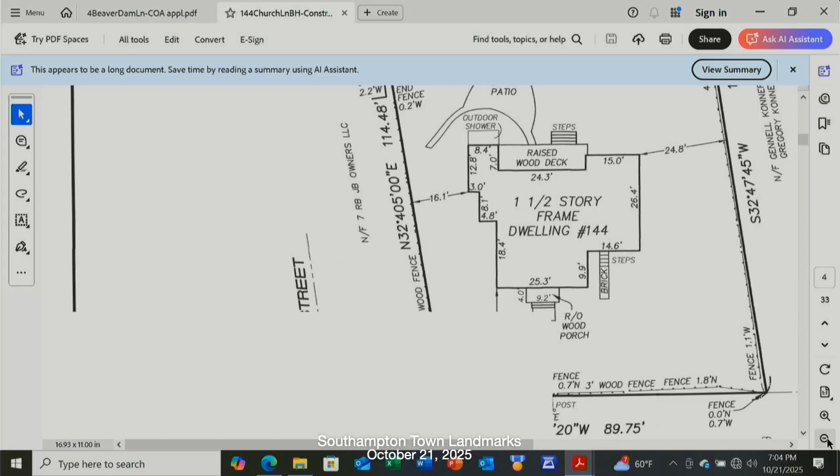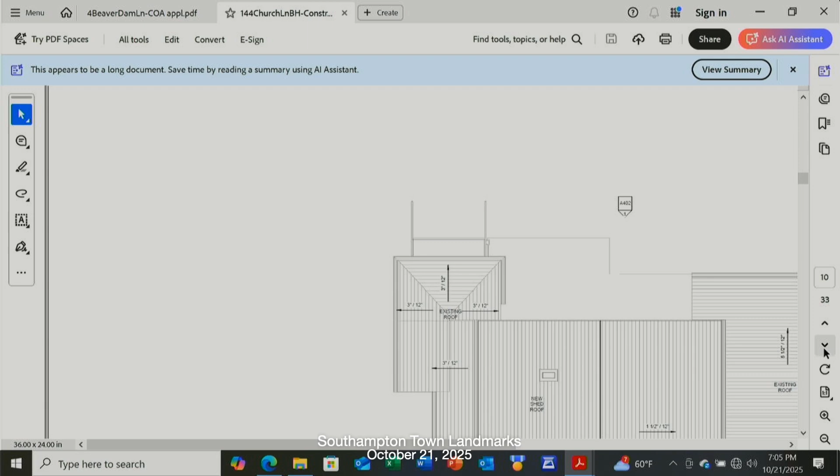Let me see if I can pull this up. Okay, here's the construction application. This is the existing situation. It fronts on Church Lane and is bounded by other properties on the other sides. Let's see, scroll down till we can get to some photographs here. Please bear with me, this is all new for me.

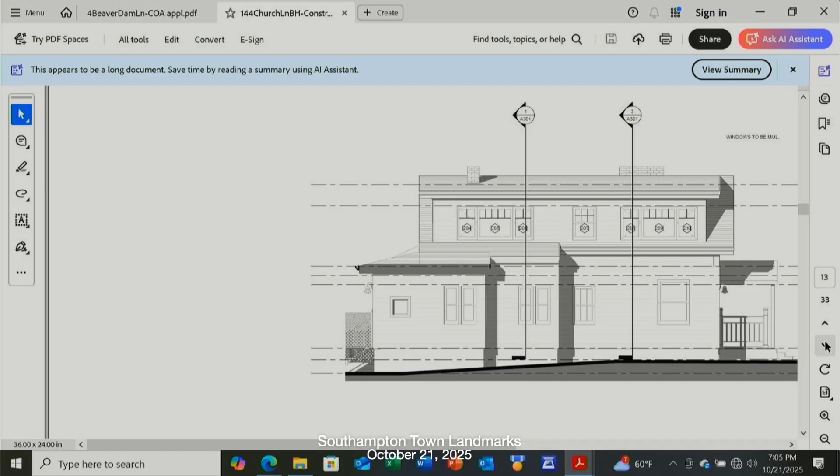So this is the attic space that's going to be converted to office space. Let's see what else we have here. This is going to be the new elevation with the attic conversion. There's a dormer, I believe, being added to the second story. It's a dormer.

There's an existing picture of the dwelling. What Ed had to say was that the construction application is to add an expansive shed roof dormer to the existing attic space under a raised gable roof ridge, to provide added living space to the one-and-a-half-story cottage. This is a building recognized in the AKRF survey as a potential historic resource. It's BHHD-117.

The entry porch appears to be original to the construction of the house, which is about 1920. The AYB of the house is 1922. Town permit records indicate a prior addition of a rear unroofed deck in 1992. Map information indicates the house was not present in 1916, but was observable on the 1930 and 1938 aerials, so that agrees with the AYB of the house.

According to the information Ed unearthed, it was Susan B. Johnson who built the one-and-a-half-story structure at 144 Church Lane. She came from an affluent family from which she received multiple inheritances, and in her early career she served as a part-time school nurse. Her circumstances allowed her leisure to spend several months each winter in the Carolinas during the 40s and 50s, and she lived in this house otherwise.

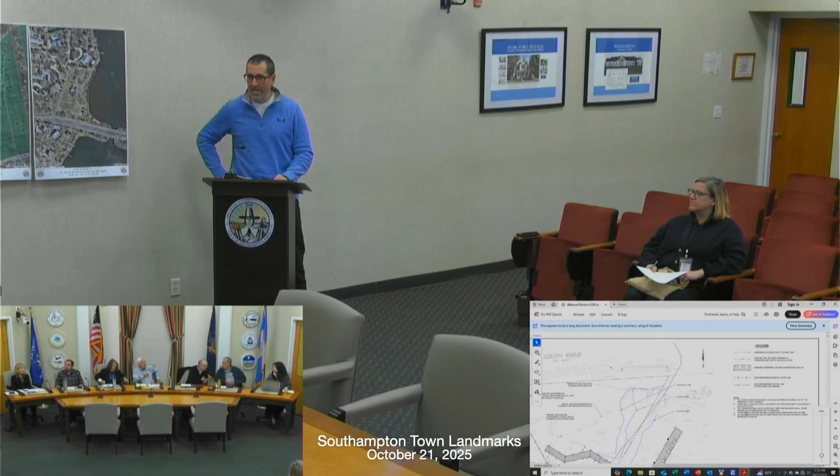So Matt Jedlicka, principal at LK McLean Associates, 437 South Country Road, Brookhaven. This project is a CPF project. It's a historic fish shack, which was basically used for fixing fishing gear and things like that. It's at 4 Beaver Dam in Westhampton. So the CPF purchased the property with the intent to, I don't want to say restore it, but basically repair it. So it's a repair of the structure as is.

There's some dock work and some accessibility stuff that we're planning to add. The dock that is on the south side of the structure and heads to the east, and then up north to the bridge, that dock is in great disrepair, unsafe. The intent is to remove that existing dock and rebuild a dock similar size, no treated lumber, all tropical hardwood. We have applied and received permission from the town trustees and the New York State Department of Environmental Conservation. We have yet to apply for a building permit, so that's why this is kind of like a pre-application meeting.

As far as the structure itself, it's a repair. We're not planning on replacing any siding. We will re-roof the structure, but that's essentially it. We're not replacing the windows. The structure was rebuilt after the hurricane of 1938, and it's kind of parged together with miscellaneous materials that seem like they were either found, so all the windows are not the same, but that's the beauty of the structure. That's about the long and short of it. It's a repair.

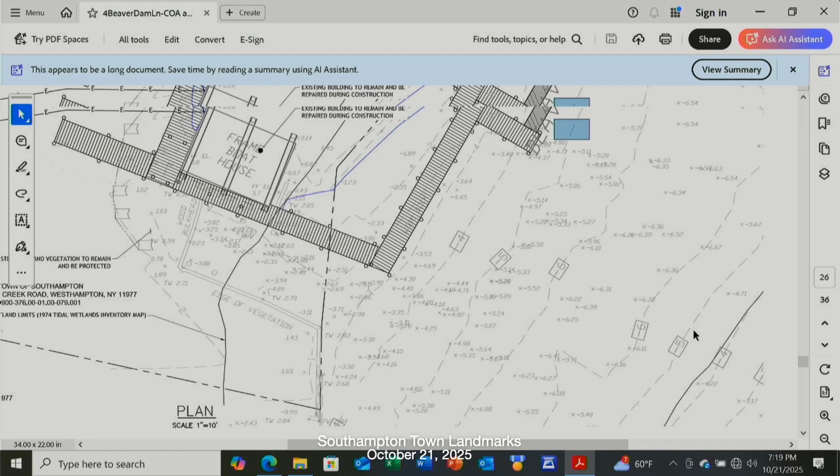So as of right now, this would be a new dock area or platform of some kind. Right, this is new, that's a new ramp up to a platform that's in front of the door that'll allow handicapped accessibility into the structure. So that's the intent of that. And this is replacement on the south side of the building, it ramps back down because we didn't elevate the dock itself to be the same height as the finished floor.

So the dock is a little bit higher than what is currently there, but not the same elevation as the finished floor. So this is essentially a replacement. Yeah, it's an exact replacement in the same spot, yes. And then I think these would be new as well here, correct? Probably the V section, but then, where the V stops, there is a dock, or catwalk, that returns to land at that location.

So the section that juts out into Beaver Dam Creek, that is new. And then the gangway down to the floating dock, that's new.

Does anybody have any questions or comments about this?

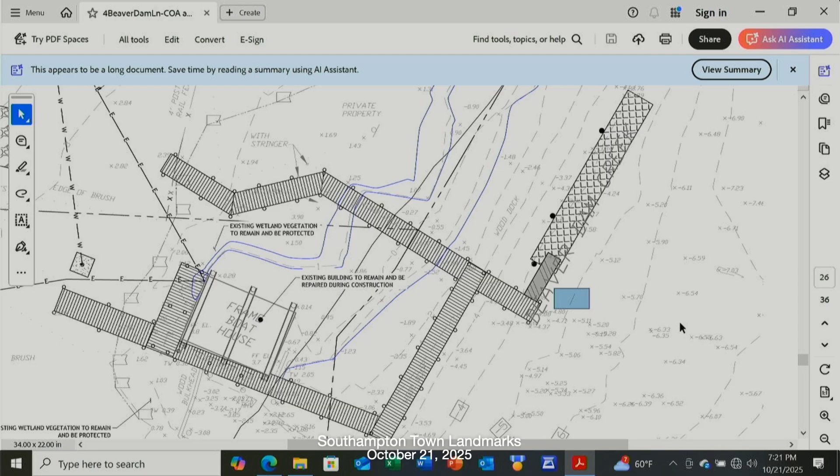I've known this property for many years. I have relations that spent a lot of time there, so I'm very familiar with the boathouse, and I think it's important that it be kept in its historically reasonable condition. I understand the needs of the Moriches Bay project for what they propose to use it for, and that there would need to be certain changes for that. But I appreciate keeping the existing siding on, keeping the existing bracing on, not changing out the collection of windows, which basically was representative of how a lot of these structures were rebuilt by fishing families after storms and things that washed away everything else.

My understanding right now is this is just a conference to get our input, and after you're done with the building department and the plans, and you're set with what you want to do, you'll be back for the COA.

Our plan is, if there's any comment, to incorporate those comments into the plan set and then submit to the building department. If there's no comments, we will probably submit this set of plans to the building department, and then I'll come back to get the COA after the building department's done what they have to do. I would assume at that time, if the building department has made any additional requirements that affect the building, we'd be discussing them.

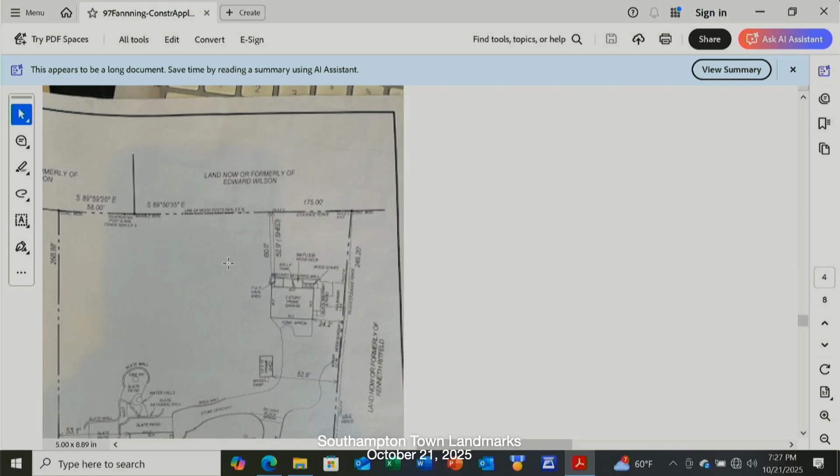The room in the front was added in, I think it was '17. It was a sunroom, and it also included all the railings for aesthetics. A few years later, just looking at a rubber roof, we put the roof deck up there. It's on top of it. It's not structural in any way.

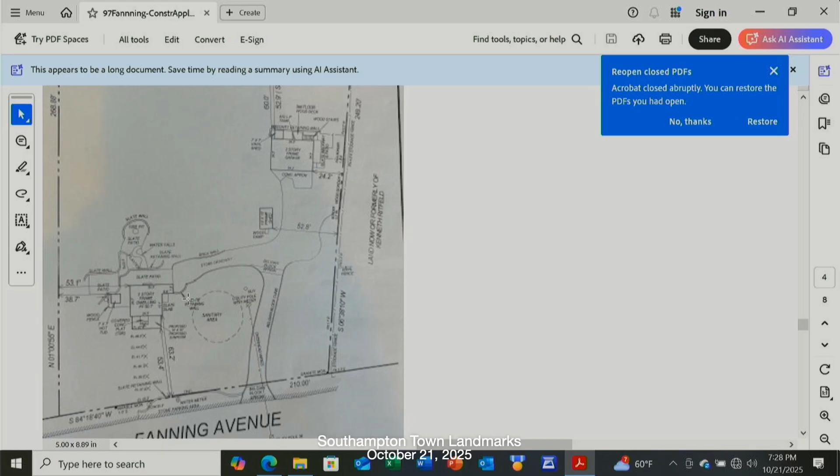There's nothing. It's just sitting on the roof deck itself.

This is on the side facing Fanning Avenue, or is it on the back side? No, it's on the front side, so it's visible from Fanning Avenue. I mean, again, looking at the pictures.

How long ago was that done? I was looking at the aerials, like a few years back, 2018, something like that. But it was approved, and everything was done as far as the railings, all approved. Everything was fine then.

Yeah, I'm sorry that we didn't. We had it recently approved by the building department. The inspector came over, looked at it, and signed off.

So when you look at the photos from up on the deck, there's no door leading to that roof deck? You go out the window. Okay, do you plan on putting in a door, or is it too low?

No, it looks like it's only about this high, so we have. It looks fairly low. I'm tired of looking at the rubber roof. It's basically roof cladding rather than a deck, other than climbing out the window. It's very Parisian.

This is for aesthetics. It's nicer to look at that with flowers than it is rubber. So you don't even use the deck, it's just visual? A couple of times, you know.

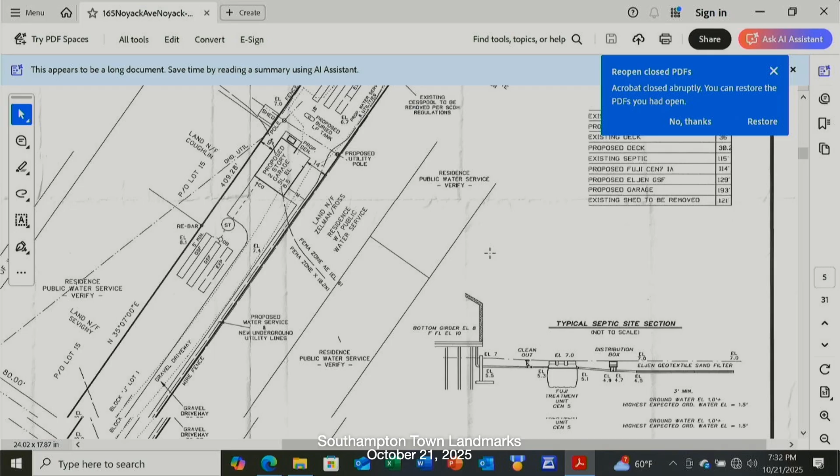This family has owned this house for the last 49 years. Now this husband and wife that inherited it are wanting to retire, and they've been working for the last 4 years to get the approvals, which they have from DEC. They have the approval for a variance for a second floor roof dormer, but they don't have the building department approval yet, obviously. Well, as they should not at this point.

Maybe after our review. And it's a pretty simple cottage that takes the aesthetic of the nearby buildings into account. Not that they're anything amazing, not any kind of amazing pieces of architecture, but they're just beach architecture.

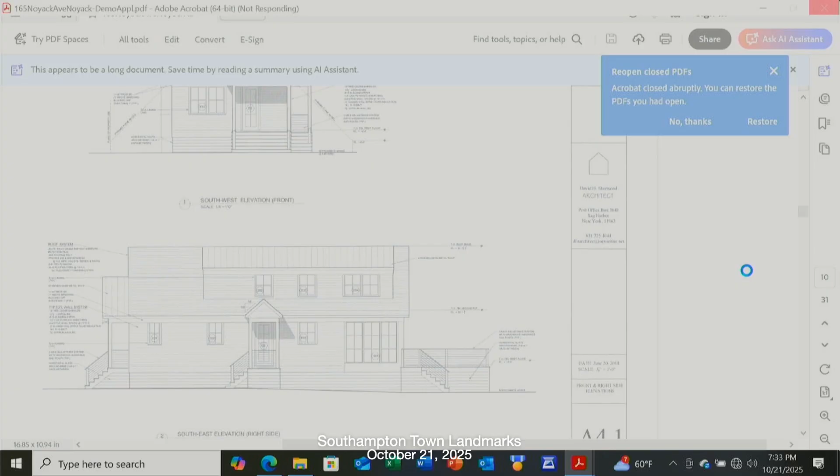And I have no objections. The house is going to be put on pilings. It's going to be raised because DEC wants it raised. I didn't see any reason to object to this either. It's not particularly visible. No, it's not.

And it's not a recognized historic resource. There is one other building on the property, which is a shed, but it's one of those sheds that comes already cutified, so to speak. It looks like a gambrel barn, but it obviously hasn't been there very long.

But that's going to, okay, and they're moving it back from the water too. And it looked like what they were proposing was not a gigantic structure either. I think they told me they have about 800 square feet now, and they'll have like 1,800 when they're finished. I don't see any reason to object to this.

The property presently includes a 1.5-story cottage with an AYB of 1940 and a detached garage with an AYB of 1940, but the detached garage likely dates from 1982 when a building permit and a certificate of compliance were issued for it. The cottage is visible from Bishop Avenue, although the garage is set back towards the rear of the property and is less visible.

The application proposes to demolish the cottage only, though when I spoke to the owner, she informed us that they're going to remove the detached garage as well. The property is not identified as a historic resource in the 2014 AKRF, nor is it identified in the historical profiles of Eastport, Speonk, Remsenburg, and Westhampton.

On the 1873 historic map, the original Beaver Dam settlement area can be identified by a grist mill, schoolhouse number 2, and a cemetery near the head of Beaver Dam Creek. On the 1902 historic map, Bishop Avenue has been opened and is noted as a private road, with several residences evident along it, all belonging to Bishop family members who settled in the area of Beaver Dam, somewhat to the north of this property.

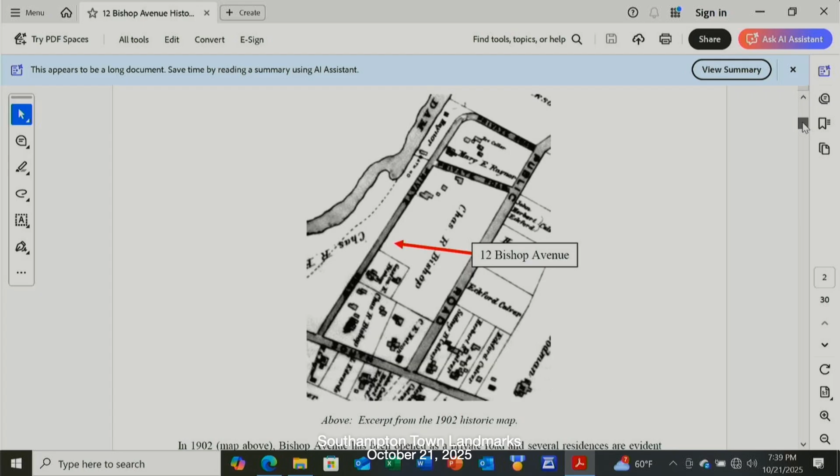The subject property appears to be undeveloped and is part of a larger property owned by Charles R. Bishop that contains several structures to the north of the subject property. On the 1916 historic map, the property remains undeveloped and is part of a larger but now somewhat reduced Charles R. Bishop property. On the 1930 aerial photograph, the property shows no development of a house yet. Collectively, the maps and aerial photo information indicate that the property was initially developed after 1930, suggesting that the AYB date of 1940 is reasonably correct for the dwelling.

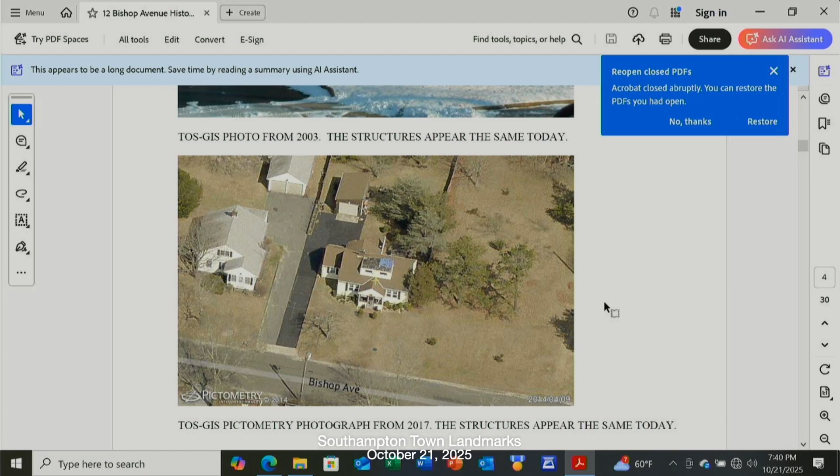The mass is irregular for the house, indicating that a number of modifications and additions have been done to the dwelling. The wood shingle roof has been replaced with asphalt shingles, the siding has been replaced with vinyl siding, and all but a few of the windows have been replaced with vinyl windows. Multiple additions have been added to the original dwelling, including a front porch addition that was later enclosed, with a brick stoop added to it.

A second floor shed roof dormer was added. The house was originally one story. The shed dormer allowed them to develop the house as a 1.5-story house, and they added stairs to the second floor, and at that time a stair to the basement.

There was a one-story attached garage previously added to the house, that was then later converted to living space, which may have been why they added the garage in the back in 1982.

There's a secondary rear addition that was added as an entry off of the previous addition on the rear of the house. There's also a circular basement, which is somewhat confusing because that tends to be found in older houses. We don't tend to find them in houses from the 1930s-1940s.

It was a big one too. Yes, it was overly large for when you see that, I think circular. I've seen it. Should have measured it, I didn't think about measuring. And the framing around it looks like perhaps they dug that basement later and then just added piers and other beams in order to support the floor joists, having taken something out of the middle of the house. Yeah, you can see the curved basement, it seems nearly there in every one I've seen. Oh, wow.

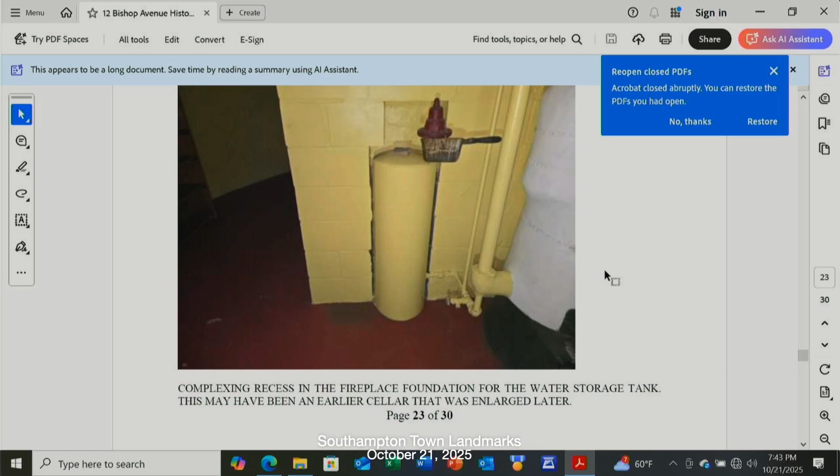Why is the water tank recessed into the foundation of the chimney? My only thought was that perhaps there was a small basement here and they wanted to enlarge it, and as they built the foundation under the chimney and the fireplace, they engulfed the water tank. Otherwise I couldn't figure out why you would do that.

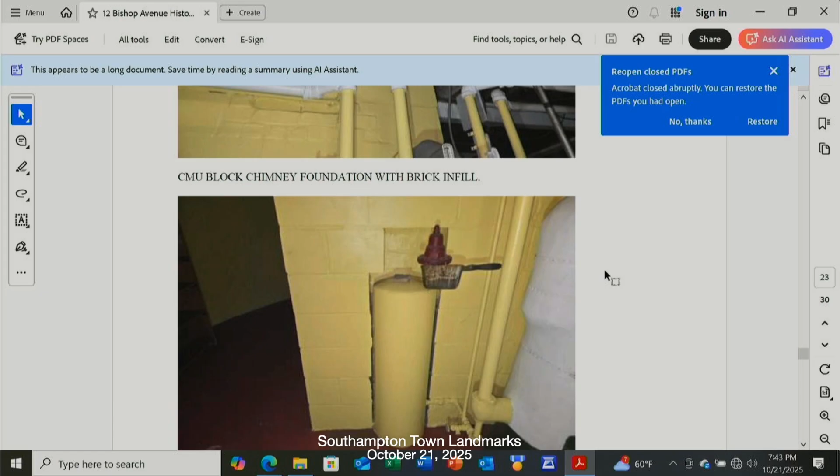That's a museum-quality furnace or boiler sitting in there, wrapped in what I can't believe is asbestos. Yeah, it's all asbestos. That it's held up as long as it has is amazing.

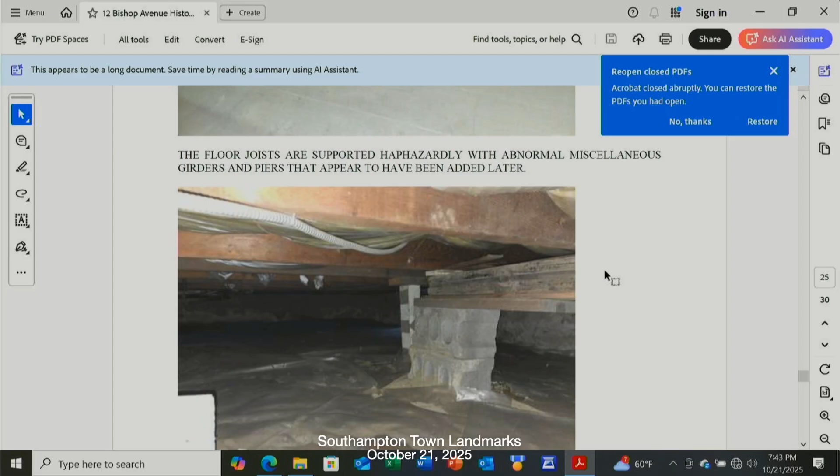So the property does not appear to meet any of the criteria for consideration as a landmark. I felt that the Landmarks Board should have no objection to the demolition application, as the dwelling has little or no historic fabric remaining on the exterior. The mass has been modified multiple times, and the detached garage from 1982 is not even a historic resource.

Well, the person that bought that, the man and his wife, they tend to have been doing that, right? They buy lots and put houses on them, on small lots. Yeah.

I see no reason to object to this. Anybody else have any? Everybody else is shaking their head too. So I think, Bill, could you make the response on this one? Yes, thank you.

Okay, I come to 54 Hayground Road in Water Mill.

This was submitted as a demolition application, but it really is a construction application. It does involve some demolition. I think, Susan, you wrestled with this one. Yeah, I will say it was. I had to sort the application out because it was a little confusing. If you could see, there were pictures of a replica house or reconstructed house, so it obviously wasn't demolished.

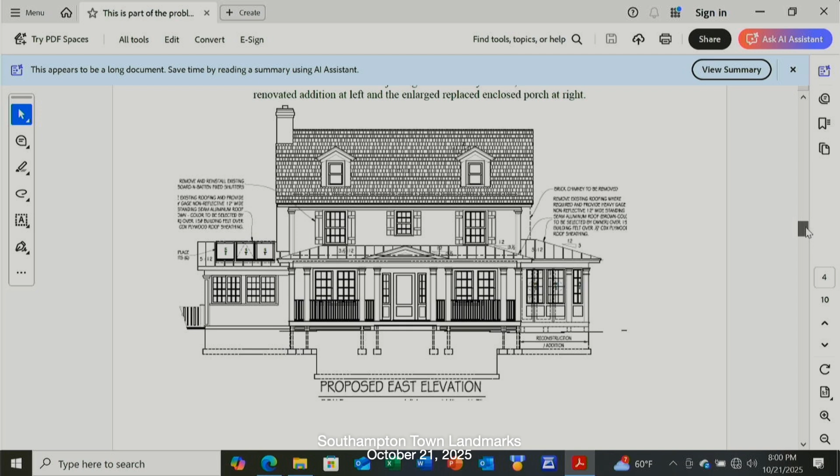As you can see, there's really no change for the main original volume. The current breakfast room on the north end is going to be demolished and rebuilt a bit larger than it is now. It's still going to have the windows that go all the way around it, as the windows will also go all the way around on the south side of the building.

This is the existing north side of the building. The changes that will occur here include demolishing that breakfast room, where all the windows are at the first level, and expanding that a bit. There is also a non-operational chimney there that will be removed. And this is what it will look like when it gets redone.

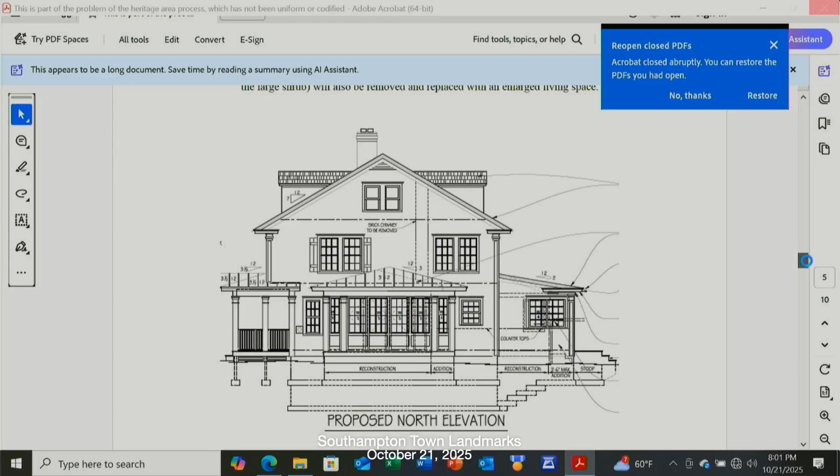The windows are not going to change, other than on the breakfast room that's going to be rebuilt. There is also a little porch addition out the back that is going to be enlarged slightly. You can't see it in the photograph above because my Acrobat is not working properly, and because there's a large shrub there. That shrub is obviously going to go away during the construction project.

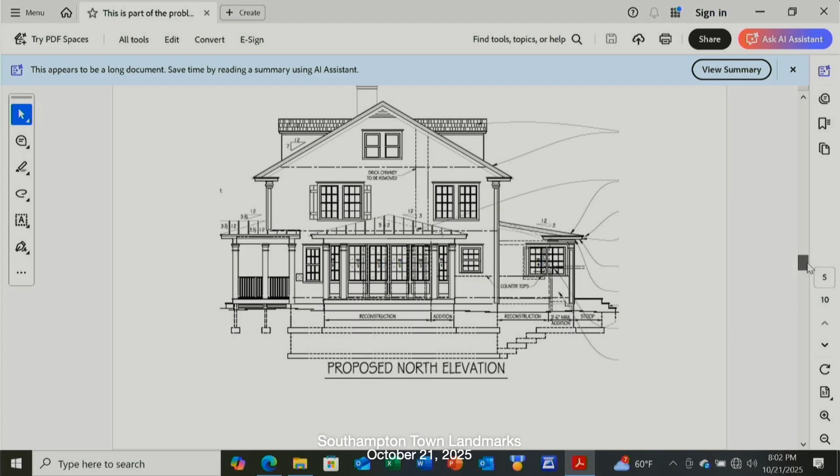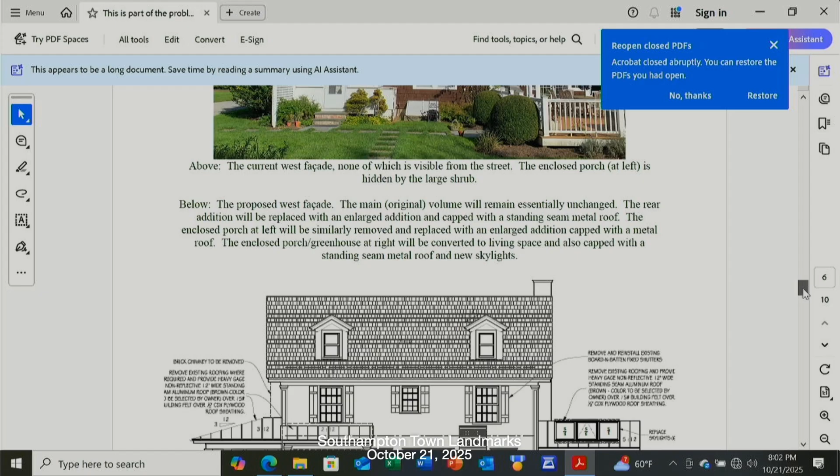The other thing that's going to happen here is there's going to be a new stoop out on the back. This is the back side of the building, not at all visible from any street or public right-of-way. The porch on the left side is going to be demolished and replaced with a slightly larger one. The garden room / greenhouse room on the south end, on the right-hand side, is going to be rebuilt and enclosed as full living space. And this is what that will look like.

Basically, the main volume is not going to change. The one thing I will note here is they are proposing standing seam roofs over the breakfast room on the left-hand side, over the little porch on the back, and also on the greenhouse room on the right-hand side. These are the only things that are significantly different from the existing construction. The existing other adjoining buildings built by the same gentleman do not have these standing seam roofs.

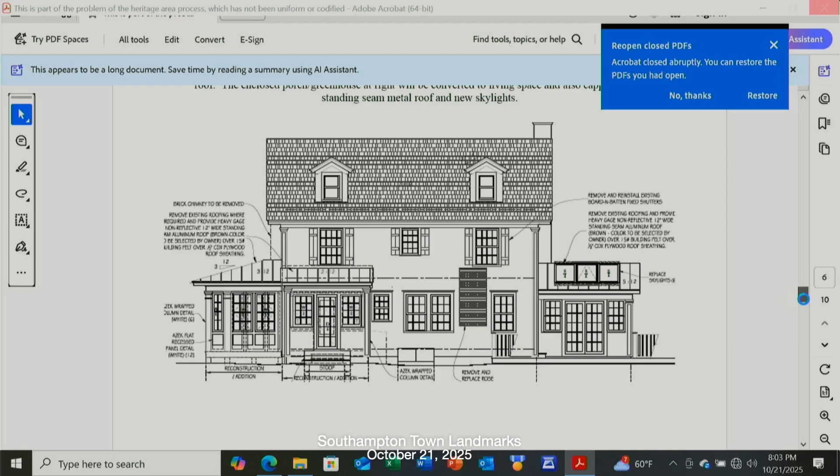All right, let's see if we can see any further things here before. These are pictures of the other two. This is a picture of its picture in the AKRF report, right there, RS-16.

And this is a picture of Lewis Pearson from his obituary. He was a well-known banker in New York City and also a big mover and shaker in the Westhampton community, very involved in quite a lot of local organizations. The families lived generally in Brooklyn or Manhattan during the wintertime and summered out here. The three daughters summered down on Shore Road in Remsenburg, and the parents lived in Westhampton in a rather large house there.

So I have no objection to the proposed work. I think the only thing that would be better from a historic preservation standpoint is to replace the existing roofing on those porches in kind, rather than with standing seam roofs. I think Bill was also in favor of that. It's his client that was driving the standing seam roofs, and perhaps the contractor as well.

So what you'll be able to see from the drive, that one area is this new northern section. You'll be able to see it - let me see if I can pull it up again. That will be a focal point. This is just driving me nuts, I don't know what the problem is. What's the program? Oh, there it is.

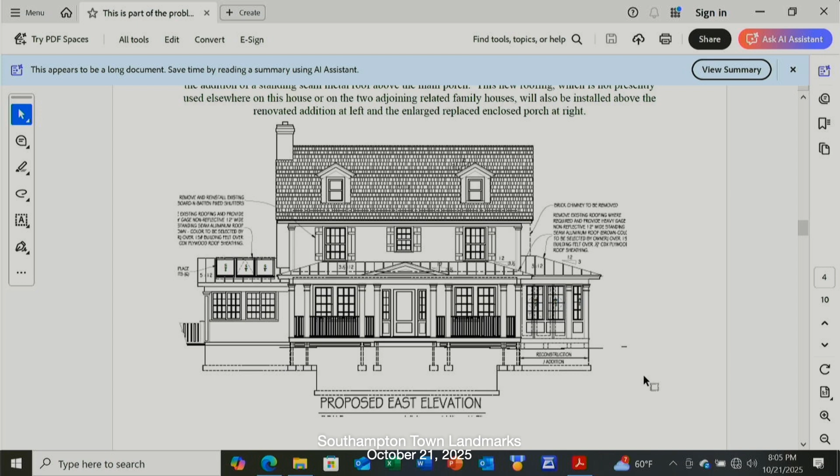I have a question - so the second-story roof is going to be replaced with a new cedar shingle? Yes, but all in kind for the lower roofs. And this is the standing seam roofs request? They're not particularly - they have enough slope on them that they could be either asphalt or cedar shingle without a problem, at least according to my conversations with Bill.

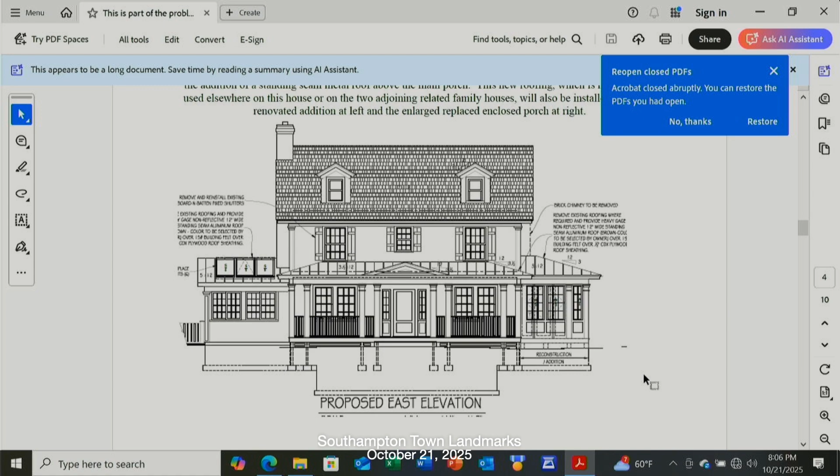But the client wanted the standing seam? I think it's some pleasant combination of the client and the contractor. And just for full disclosure, the contractor working on this is the same contractor who did work on my mom's house a couple of years ago, so I'm kind of familiar with his mode of operation - not a surprise that he's proposing this kind of roofing.

I see. Well, it seems to me like if you were going with a standing seam roof, do a true standing seam roof that's a little more period than the kind you buy from the lumberyard today that snaps together. So, if it was a standing seam roof, obviously a painted or finished surface on it.

Anyway, of the three houses, this would be the only one that had standing seam roofs on it. And if we were to try to establish some sort of thematic historic district around these houses, and perhaps some of the other houses in Remsenburg that were built in the 1920s, it just wasn't something that was used at that time. So it's just not, in my mind, historically appropriate for these houses in this community.

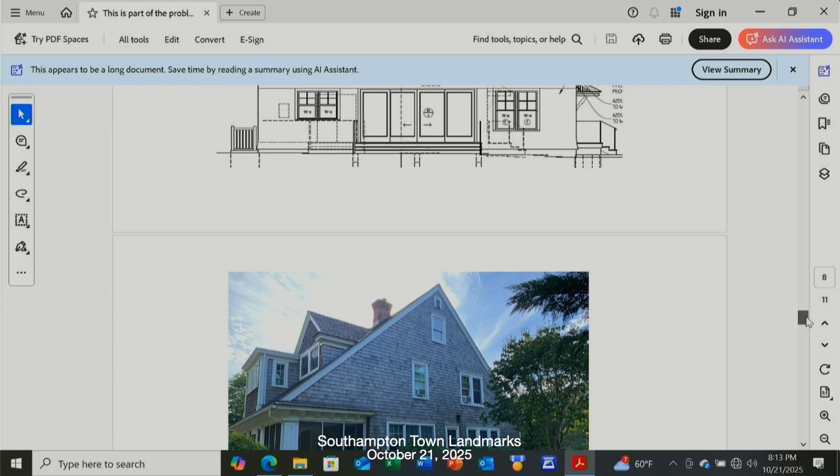Let's see, this is the front of it now. It's more of a shingle style house with white trim, kind of looks more copacetic with our local area. But all of the windows, with perhaps that one exception, and then I think there's one in the back as well, have been replaced.

Okay, so this is what's proposed. There's an addition proposed on the south side. By the way, this is the side that faces Basket Neck Lane. It's pretty visible from the street.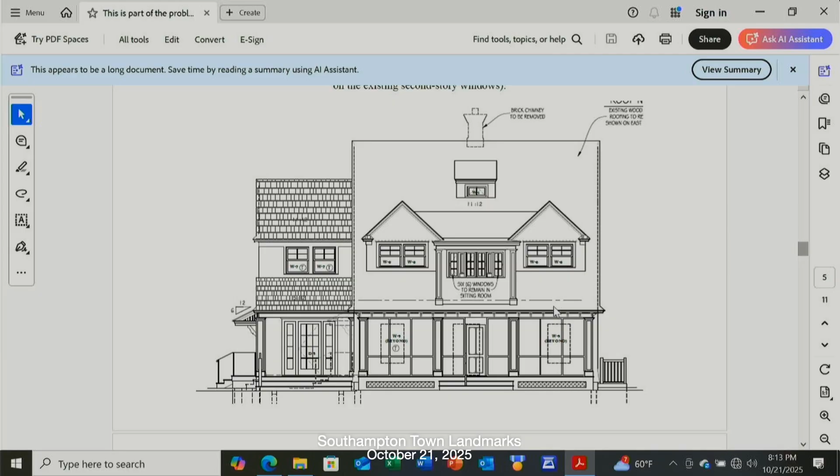The north side is also visible from the adjoining Nickerson Lane. This addition will be visible from the street side, but there's really no other changes proposed for the facade on this side other than removal of the brick chimney.

Oh, please, don't send me a report. All right.

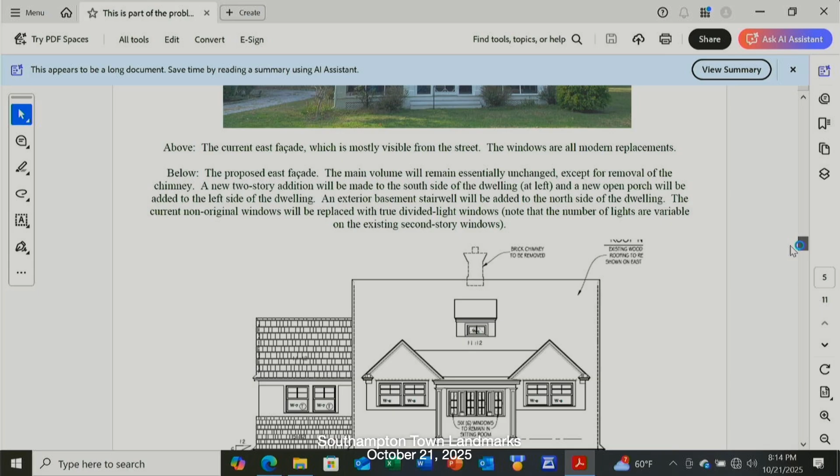All right, this is the side of the building on which the addition will be made.

Okay, so this is the existing south side of the building, and the addition will go on this side, and it will essentially mimic the form of this side. And you can see the addition right here. This is the main volume underneath.

There's going to be some changing of the windows, and a vent up here, and then a big dormer out the back that will be added. A little porch over here on this side, a little porch out the back.

This is the back of the house. This house, the back is not at all visible from any of the surrounding streets. It's fenced and it's got a big hedge around it. You just simply can't see it.

Very plain in the back. A little tiny dormer up here that may have an original window. This is definitely an original window, it's got wavy glass in it. The other windows have been replacements, and they're kind of oddly spaced on this volume.

All right, let's see if I can get this down. No, it's not responding. Close it up, open it again. Let's see if we can get down to there quickly.

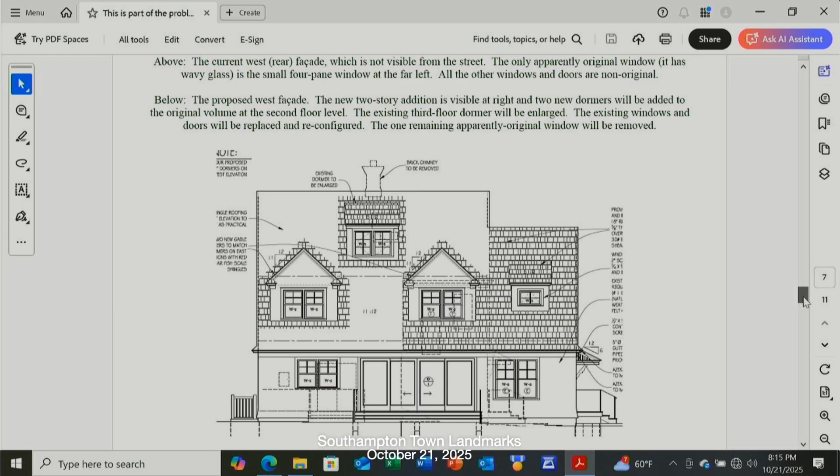Okay, so here's what's proposed for the back of the house. Here's your extension on the south side, addition on the south side.

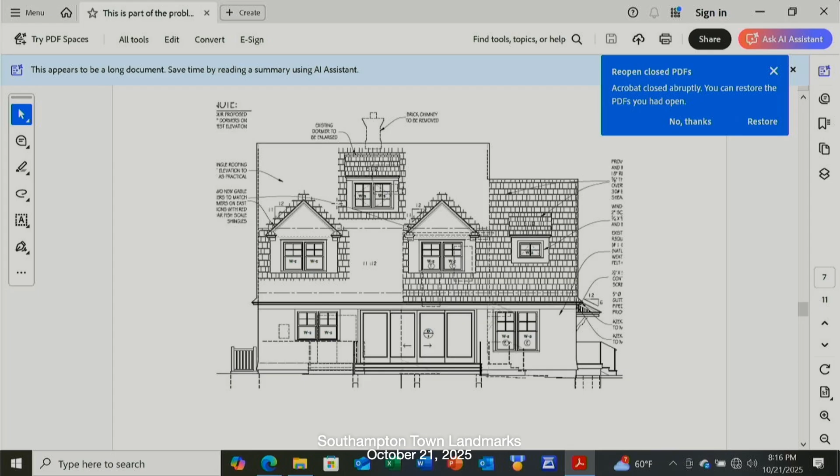Here are the two new dormers on the back, which essentially mimic the dormers in the front. The existing upper dormer here is going to be enlarged somewhat. There will be sliding glass doors out the back, but again, this won't be visible. There is one little window here that's original that will be lost, and I was going to recommend that this be salvaged. You'll see there are some windows added in the side of the dormers here, and they are of a size that that little window could be reused.

This is the north side of the structure. It faces Nickerson Lane. Lots of shrubbery and stuff. It's very difficult to see this side of the house from the street. You can see a little bit of the hedge here along the road. Again, very, very difficult to see.

Let's close out of here. Close. Close it.

Yeah, I think that's probably not a bad idea. This is just crazy. I never have this problem.

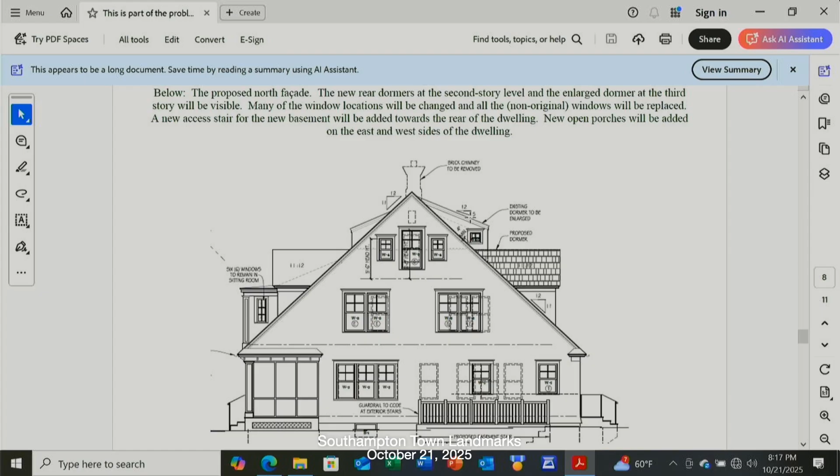All right, here's the proposed north side. What's going to happen here is there's going to be some windows changed up top. Here's the new dormer out the back. Here's that upper dormer, and here's a little spot where they might be able to reuse that little window up top. They are going to be lifting this house and putting a full basement under it, which originally these people, when they purchased the house, were planning to demolish it, because they wanted a big basement so they could have the gym and all the stuff underneath. And Bill has convinced them to keep the house and simply to lift it.

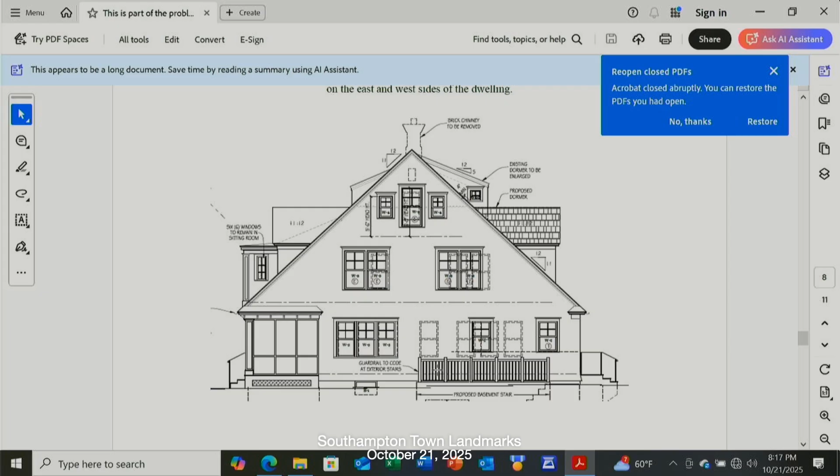Yeah, I think so. I think people will be happy with it.

All right, I think I'm going to take your suggestion and try to reboot this. It may take a few minutes. Just get out of here. Restart. All right.

We had to reboot the computer. Yes, my Adobe seems to be possessed. Maybe I haven't re-upped it, although I should have by now. I've used it for years, at work and at home. I purchased it, and I've just never had this kind of problem before. Well, the one problem here is I'm on Windows 10, and this computer is so old I cannot update it. Oh well, that's underway, but it hasn't happened yet. I think by the time we have our next meeting, I will have my new computer.

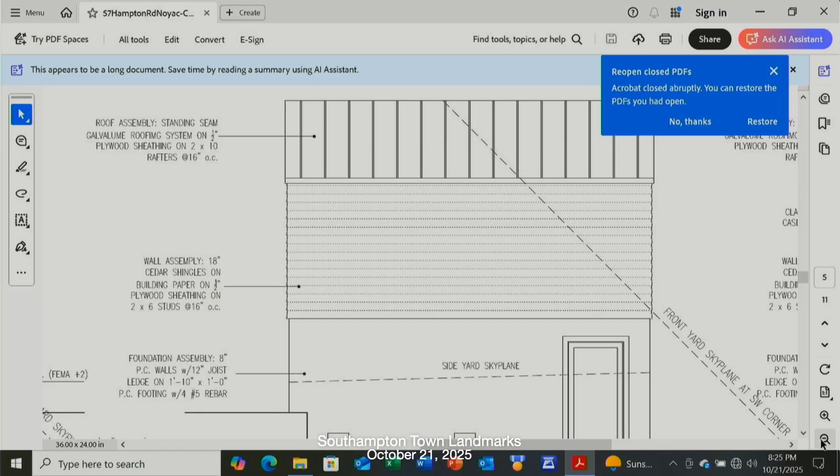I think this thing has gotten worse. And really, for the second floor, it's not a full second floor—it's like a Cape Cod roof. But on one side, they're getting a variance for zoning. So that's what it's going to look like, I guess. It is sort of like a full second floor, yeah.

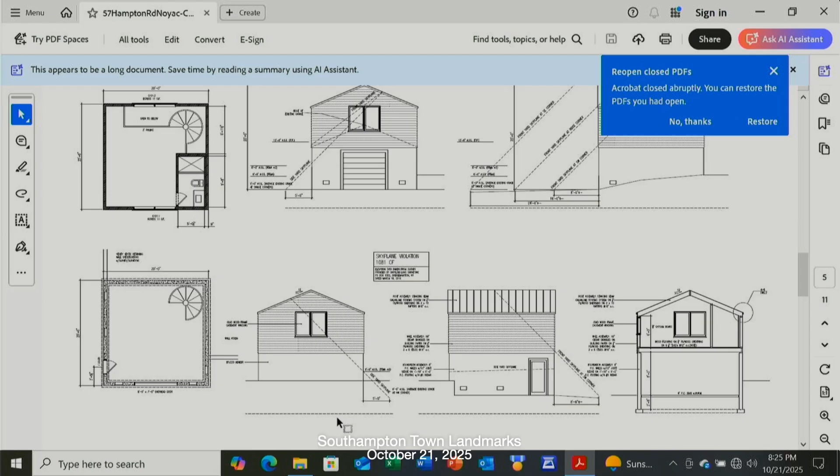As much as we'd miss the roof, or miss the view, I don't see any reason to object. I wish I could show you this picture, but it shows how far that garage is from the house, and that there are water views on the sides—the height is not going to change. Although across the street, there are houses that probably from their second floor could look across and see water, but won't be able to.

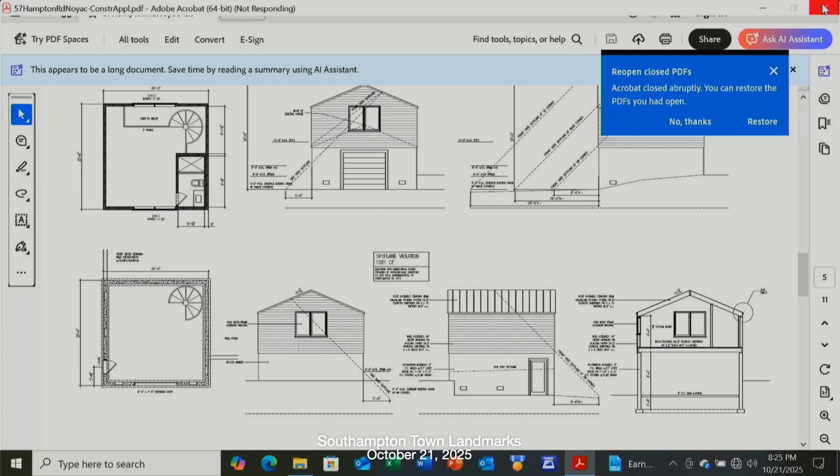Okay, well, it's kind of a dense area. I was looking at some of the pictures they submitted, and it looked like there was a bunch of two-story things all around. Yeah, every time I go down there, there's another house that's been whipped down and new ones going in. It's a real turnover.

All right, do we have any objection to this proposed? Do you want to object? No objection—I wish we could save the one story, all the little cottages up there, but I don't see any historic value to this garage. Jeff, could you do the response?

Okay, we have already dealt with 97 Fanning. 38 Vale Avenue. Completely locked up now. There we go.

The proposed construction application is for the installation of solar panels and a battery wall set back on the south side of the dwelling. The Landmarks Board does not have purview over the solar panels, but does over the battery wall. The detached garage in the back is not included in this application at all.

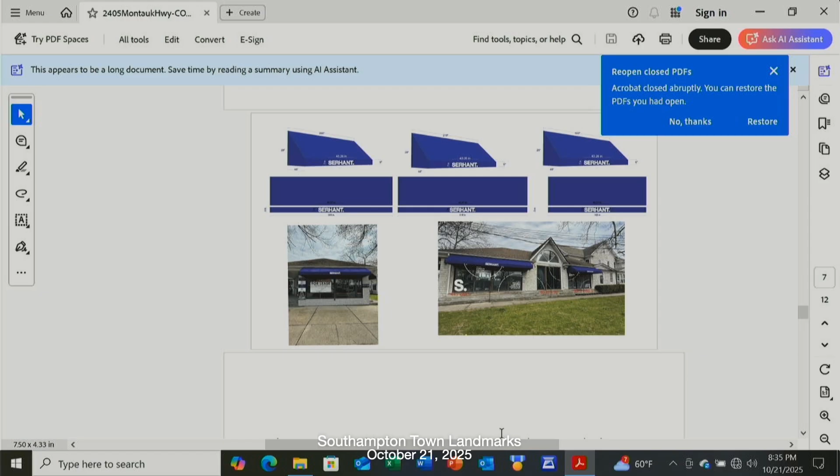I think Ed previously circulated some other pictures showing awnings in the Bridgehampton Historical District that were similar to this one. I don't see any reason not to issue the COA for these. So if everybody's okay with this, we will go ahead and do that.

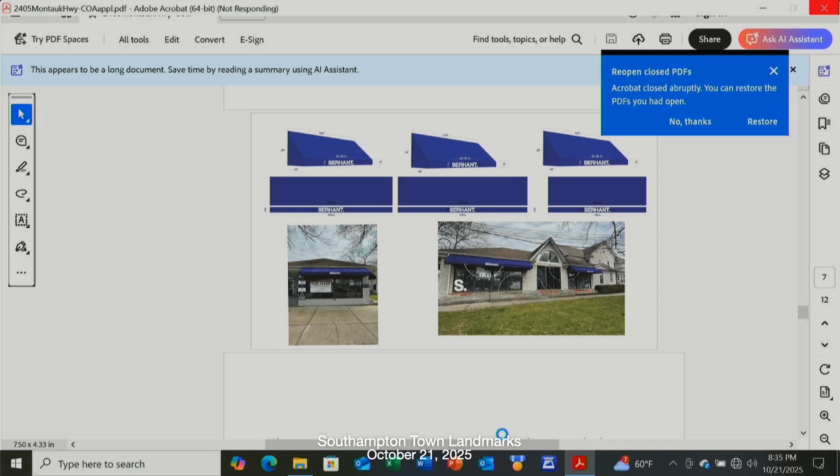Resolved that the Landmarks and Historic District Board issue a certificate of appropriateness for the proposed replacement of 3 awnings on the north and west sides of the commercial building at 2405 Montauk Highway in Bridgehampton, pursuant to the proposed plans for said awnings.

Do we have a proposal? Move? Second? All in favor, say aye. Any objections? Okay, we'll have to do a reso.

We'll work on that. And then we addressed 4 Beaver Dam Lane in Westhampton, which we will see again. And then there's 2422 Montauk Highway in Bridgehampton.

Let's see if we can close out of this one. Come on. All right, you don't wanna... there we go.

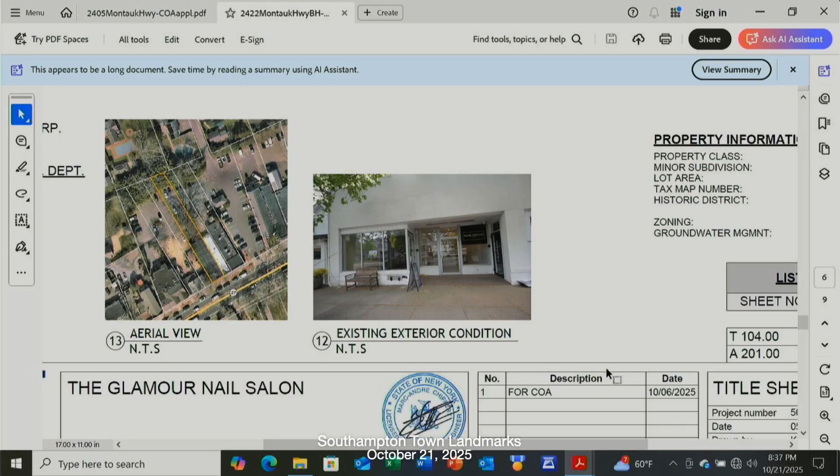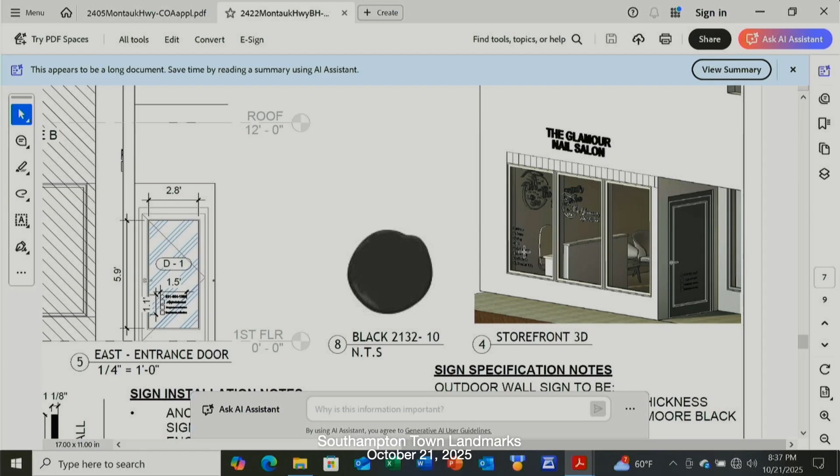This is for proposed signage above the window and in the window of a nail salon. Here's the existing exterior, and let's get to the proposed exterior. The proposed exterior has the Glamour Nail Salon sign above on the facade of the building, and then it has Glamour Nail Salon written there, and some text on the window. That's what it's going to look like.

Does anybody have any comments on this particular application? Isn't this the application we actually went through already? Yes, but it was missing something - I think it was missing actually the sign on the building itself.

Pain in the neck. I thought it was just the interior paperwork - it was interior renovations before, and that's why we asked to review it, because we didn't know if any of the interior renovations were going to affect the exterior appearance, and we confirmed that they weren't. But now this is for the signage, which obviously does affect the exterior appearance.

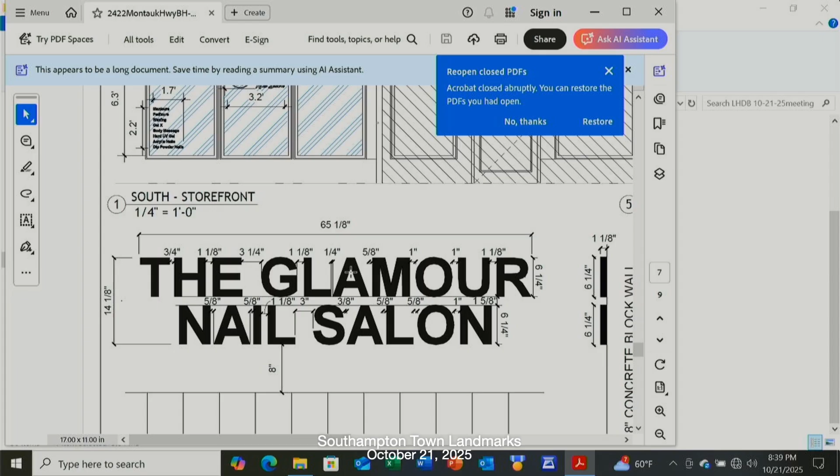Are those just letters, or is it a physical square sign? It looks like it's letters to be applied to the building. And then there's a sign that's going to be applied to the glass, and a list of services to be applied to the glass here. And that's the sign relative to the side of the building. It looks like it's a 14 and 1/8 inch total height of the 2 sets of letters.

Does anybody have any comments on this? Each line is about 7 inches high - 6 1/4 inches high, and there's 1 5/8 inches between them. Am I reading that right? Yeah, it's 1 5/8 between the two lines. So basically, the total sign height is going to be a little over a foot. Not very large.

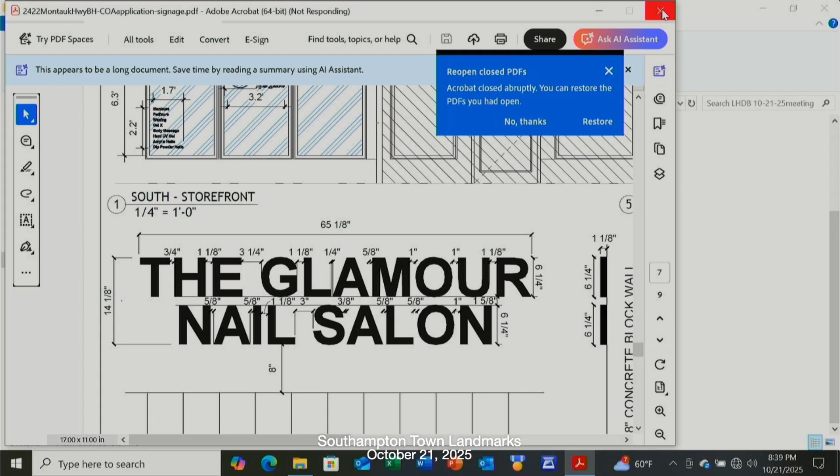Hang on a minute, I'm gonna have to open this again. Are you talking about the next door neighbor? Oh, that, yeah - there's one next door that is not the subject of this application.

So this is the existing hair salon, which we've already looked at, and then this is the nail salon, which it looks like the sign height for each set of 2 lines is about the same.

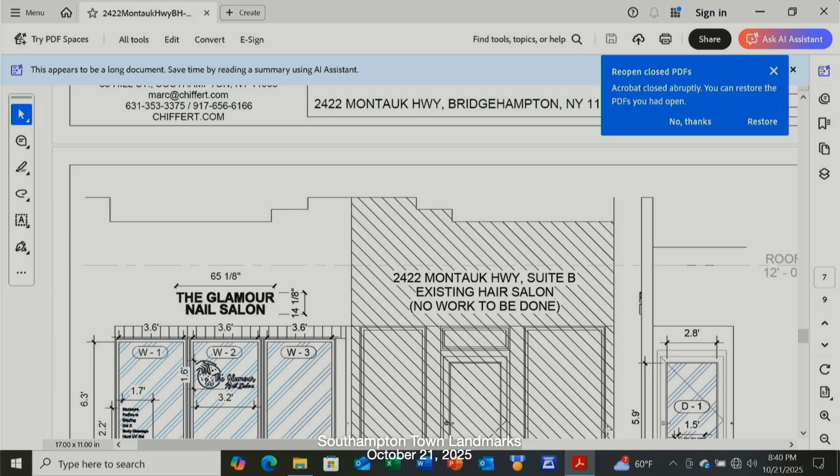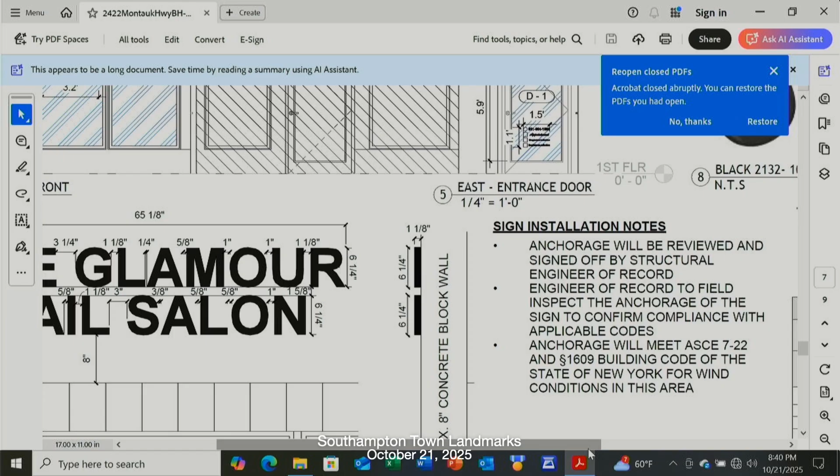I didn't see any indication of lighting on it, either absence or presence. I don't think that there is. Here's what it says: anchorage will be reviewed and signed off by engineer of record - talking about anchorage of the sign. I didn't see anything here suggesting otherwise. Wood material, 1 1/8 inch thickness, painted black with an Arial font - about as basic as you can get.

Does anybody have any issues with this proposed sign? Okay. We're gonna need a reso for this then.

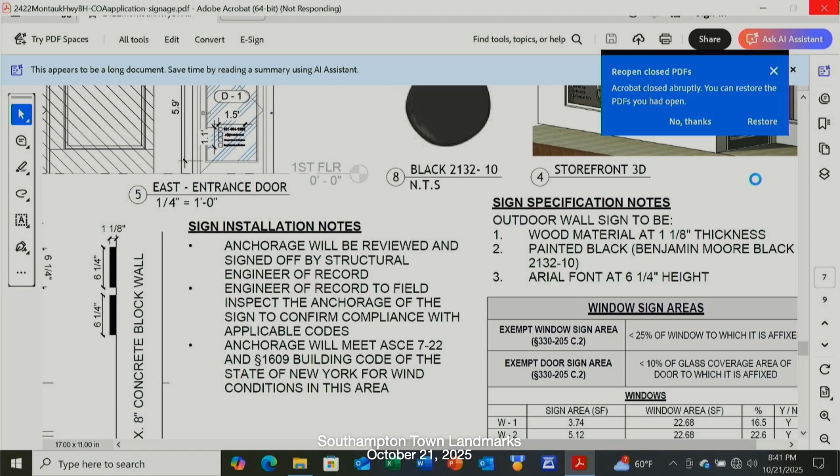So the resolution would read: the proposed signage on the commercial building and the 2 associated glass windows as proposed in the application for 2422 Montauk Highway, Bridgehampton - no objection there, or something along those lines. Does anybody have any better wording? Well, you're not saying you object or not object - what you're saying is you approve the COA. Okay, so we would approve the COA for 2422 Montauk Highway, Bridgehampton, specifically for the proposed signage on the facade of the building and on the 2 windows as per the application.

Motion to approve, second? Okay, all in favor, say aye. Any objections? No objections, okay. We'll work on some language for that. Maybe Vicki, you could help me with that one too. We'll work that up.

Okay, next on deck are two, come on. That's one way to close it.

Two landmark applications. The one on top is for 53 Foster Avenue in Hampton Bays. This is submitted by Amy Paradise on behalf of the Hampton Bays Historical and Preservation Society, for 53 Foster Avenue in Hampton Bays. There's a lot of information submitted with this application, including copies of deeds and information about the construction of the house, but there have been no photographs submitted, and there's really not a comprehensive narrative of the history of the property. The property is owned by a 53 Foster LLC with an address in Bronxville.